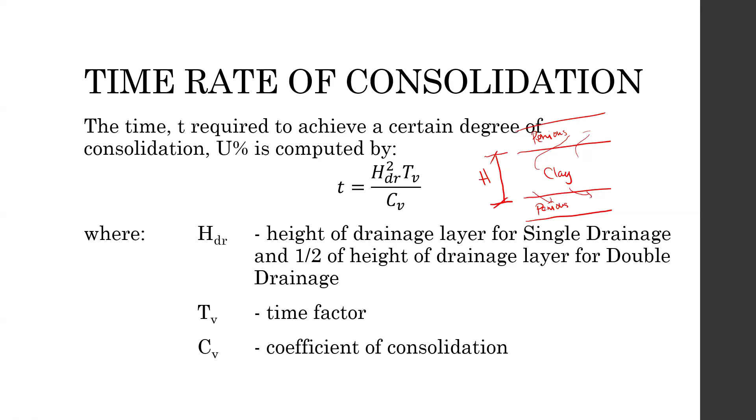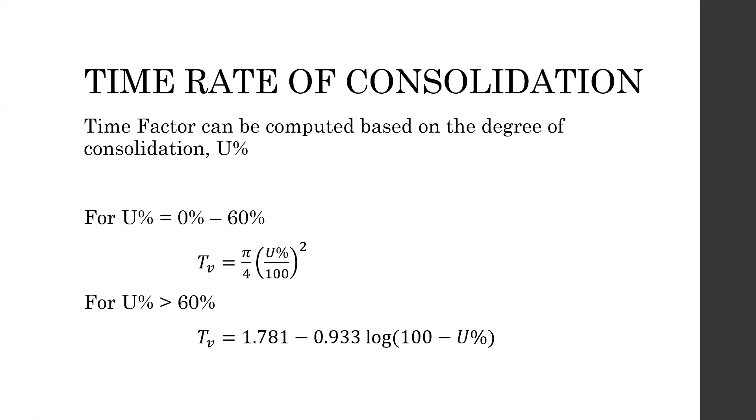So next, the time factor can be computed based on the degree of consolidation. If the degree of consolidation is from 0 to 60%, our Tv is pi over 4 times (U% over 100) squared. But if it is greater than 60%, it becomes 1.781 minus 0.933 log of (100 minus U%).

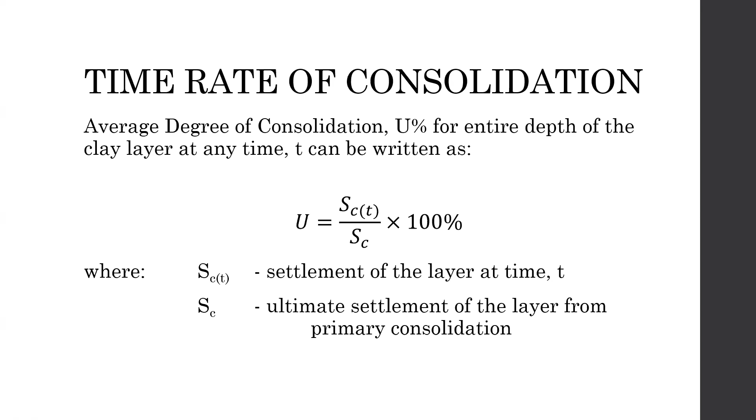Okay, let's have an example problem in the time rate of consolidation. The time required for 50% consolidation of a 25 mm thick clay layer that is drained at both top and bottom in the laboratory is 2 minutes and 20 seconds. How long in days will it take for a 3-meter thick clay layer of the same clay in the field under the same pressure increment to reach 50% consolidation? In the field, there is a rock layer at the bottom of the clay.

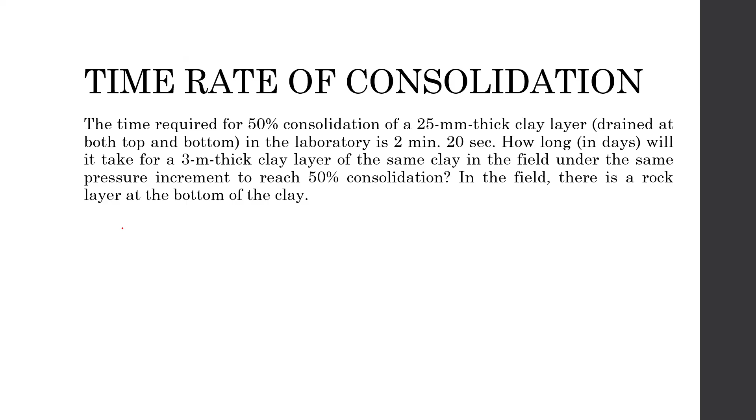So first, if we have this type of problem, let's draw the diagram for the laboratory. In the laboratory, it says that the thickness of the clay layer is 25 mm. And it is drained both top and bottom. So therefore, may drainage tayo dito. Drainage din tayo at the bottom. So therefore, this is double drainage.

Okay, then we have the other properties or data for the laboratory. The percent of consolidation U is equivalent to 50%. And then we also have the time for consolidation T, which is equivalent to 2 minutes, 20 seconds.

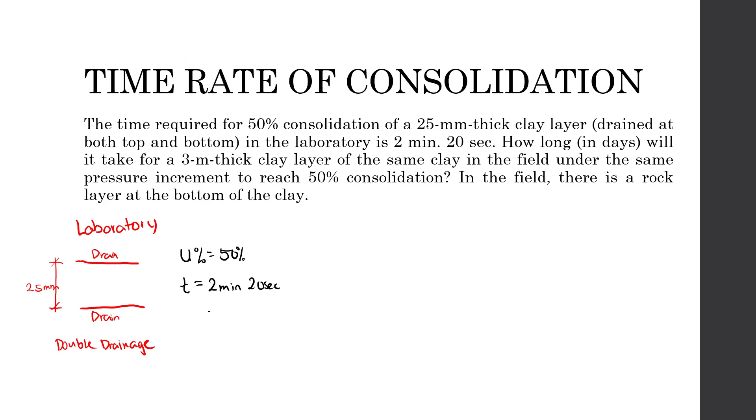So next, let's draw the diagram for the field. In the field, we have a 3-meter thickness of clay layer. And this here is the clay layer. Then the same amount of consolidation, 50%.

Then in the field, there is a rock layer at the bottom of the clay. So let's say merong rock dito, pero the top layer of the clay is not indicated kung ano yung meron dito. But we can say that there's a drainage here. So therefore, this is a single drainage.

Okay, then the question here is how long in days? How long it will take the settlement or the consolidation of your soil in the field, given that yung U natin is 50%. Okay, so yung tanong dito is yung time. Okay, so ganito siya. To remember, the formula for the time rate of consolidation is T is equivalent to HDR squared TV over CV.

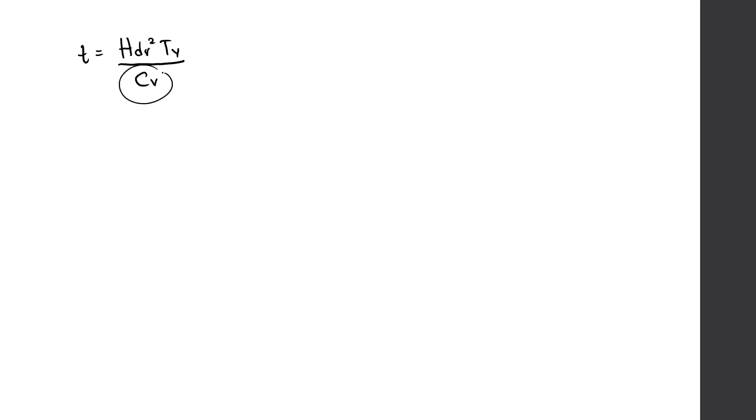Sabi natin that CV is a property of soil when it comes to consolidation. So we can write that the formula of the CV, or the coefficient of consolidation, is equivalent to HDR squared TV over T.

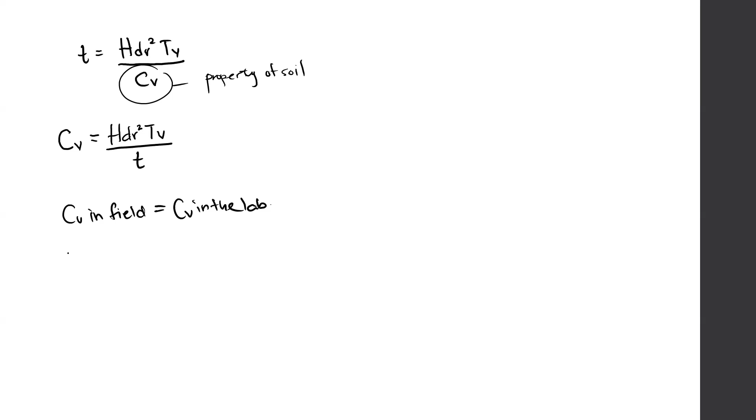Now, sabi natin, CV in the field is equivalent to CV in the laboratory. Obviously yan, lagi yan, of course. Kasi nga, property na siya ng soil. So therefore, our formula will become HDR squared TV over T, and this is under field condition. And that is equivalent to HDR squared TV over T, and that is under the laboratory condition.

Okay, so first, let's identify all of the parameters under the field condition. The field HDR: in the field, we have a 3-meter clay layer. So this is a single drainage. So therefore, yung HDR natin is the full height of your clay layer. So let's say that it's 3.0 meters.

The next, the TV or the time factor. So yung TV natin is based on our percent or the degree of consolidation. Degree of consolidation in the field is 50%. Therefore, if our degree of consolidation is between 0 to 60%, our formula for TV is pi over 4 times U% over 100 squared. So the value of your TV is 0.1963495. Okay, the next, the time in the field is T, this is the unknown.

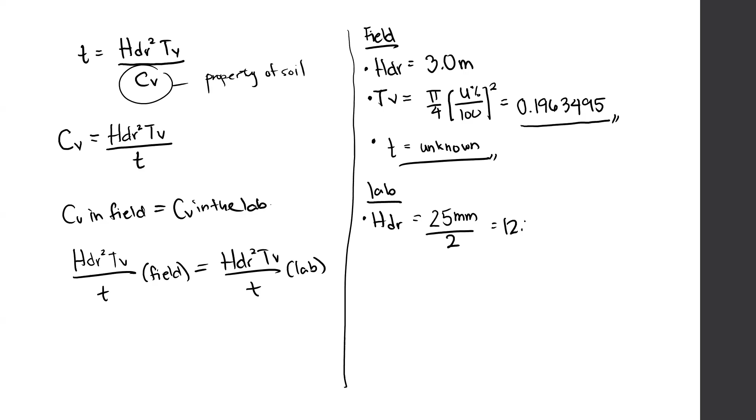Okay, the next for the laboratory condition, HDR. So based on the laboratory condition, meron siyang double drainage. So therefore, that is half of the height of the soil layer. So 25 mm divided by 2, equivalent to 12.5 mm. But take note, in the field condition, we're using meters in our HDR. So we can convert it into meters. So therefore, the value of our HDR is

0.0125 meters. Okay, the next, for the time factor TV, since 50% degree of consolidation, we have 0.1963495 also. Pareho lang sila ng degree of consolidation. Then, for the time T, meron tayong time dito that is 2 minutes and 20 seconds. But our time has 2 units, so let's combine it into 1. So the 2 minutes and 20 seconds is equivalent to 140 seconds.

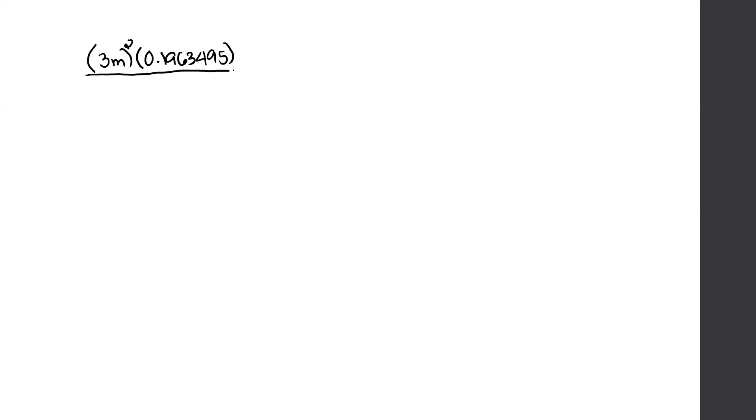Okay, so let's try to compute now the time required in the field to have a degree of consolidation of 50%. So HDR in the field is 3 meters squared, times the time factor of 0.1963495, divided by T, which is unknown. That's equivalent to, in the laboratory, 0.0125 squared, with the same time factor value, divided by 140 seconds.

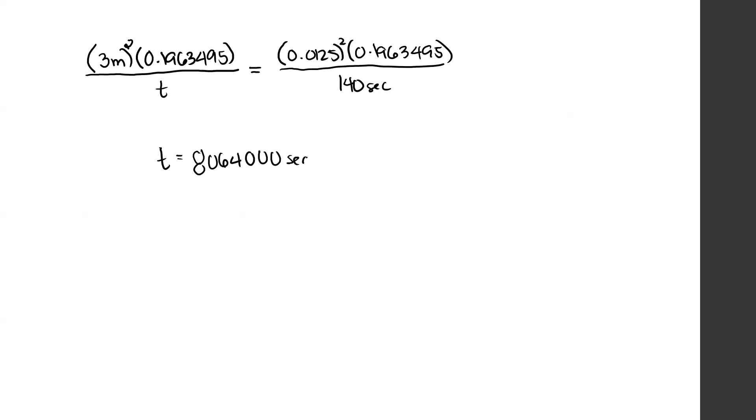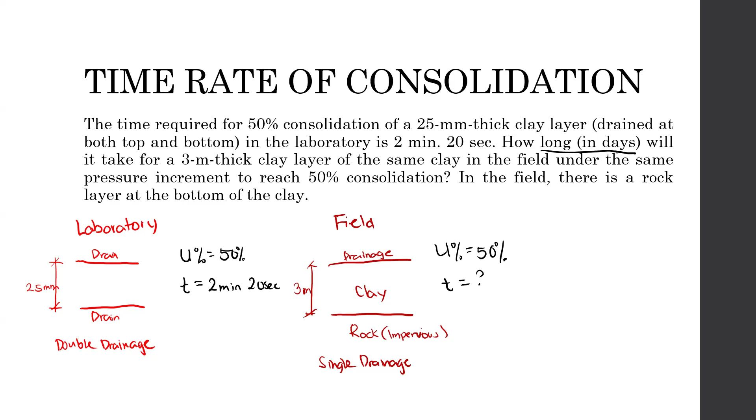So therefore, the time required for the clay in the field to have 50% consolidation is 8,064,000 seconds. So this is a lot of time in terms of seconds. But the problem asks how long in terms of days will the 50% consolidation of your clay layer in the field take. So we need to convert it into number of days.

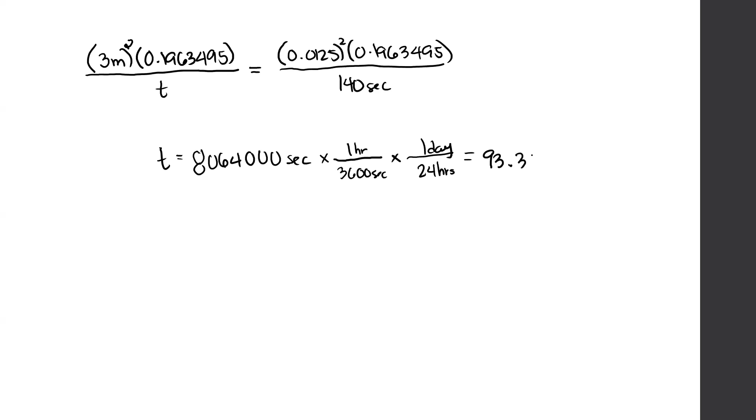So 1 hour is equivalent to 3,600 seconds, and 1 day has 24 hours. So therefore, the time required in terms of days is 93.33. So this is now the final answer for that particular question.